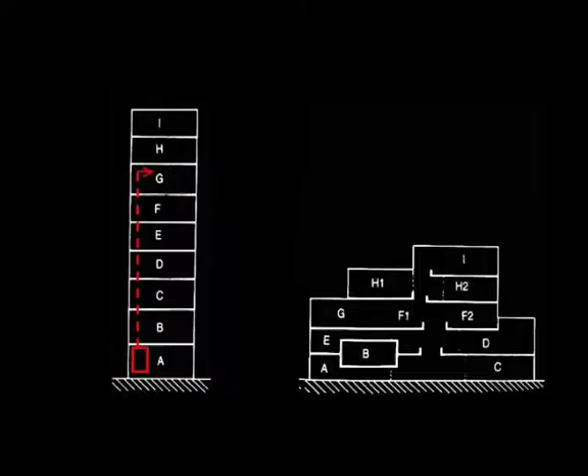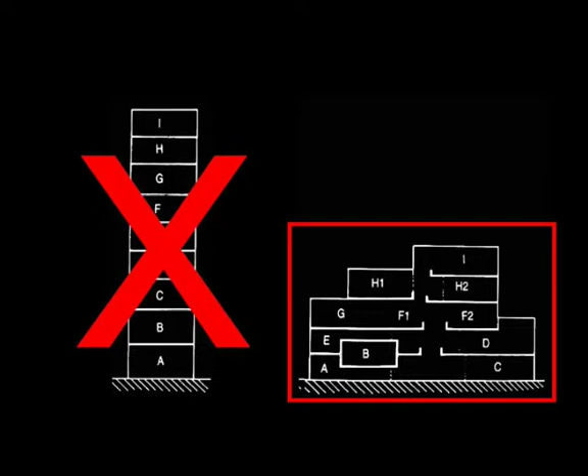Now, if you were to live in or use a low-rise or medium-rise building, then what you get is a much more organic movement between spaces. You can freely move between one and the other, and you don't have to go through this mechanistic way of pressing a button to go up to the top of the building. And so my challenge to architects and engineers who design skyscrapers is: why can't you design your skyscrapers the way you design low-rise and medium-rise buildings? The answer is yes. But why don't you do it? It makes a much more humane and much more habitable space. And so this is one of the ideas that I started with.

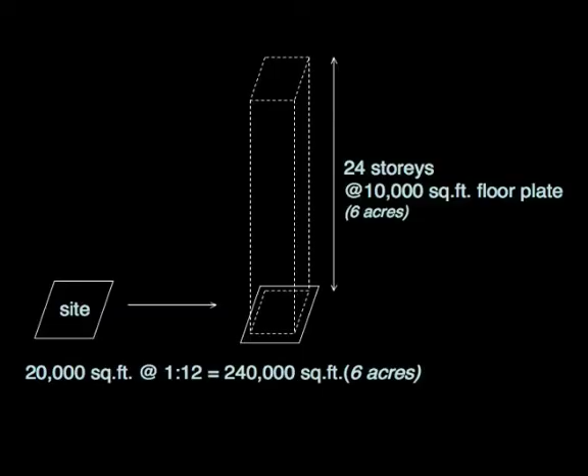And I said, let's not design skyscrapers as homogeneous stacking plates, one on top of each other, giving us instant stratification, but try and design skyscrapers in a much more organic way, in the same way that we design low-rise and medium-rise buildings. And so I started to think, why can't you design skyscrapers the way you do urban design? Now, if you take a site of about 20,000 square foot, I'm sorry, this is not metric, and if you have a gross floor area plot ratio of 1:12, then you have the potential to build a 240,000 square foot building. If you have a floor plate of about 10,000 square foot, what you have is a 24-story building.

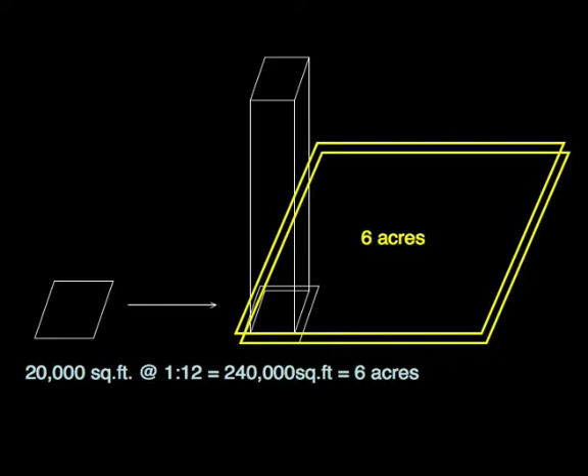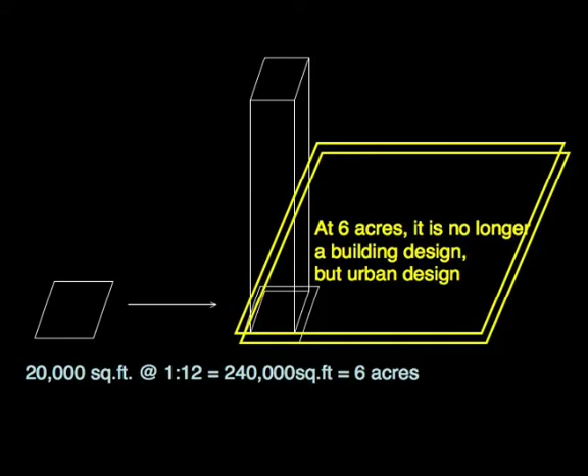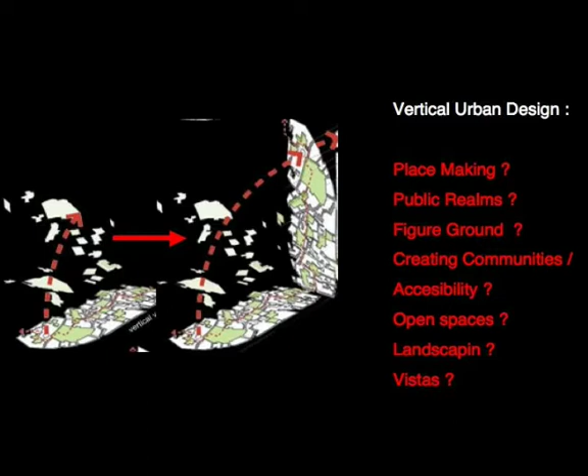Now, if you spread it all out in a single-story building, what you have is a building of about 6 acres. And if you ask an architect or a planner to design something on a floor plate of 6 acres, what you have is not architecture anymore. What you have is urban design. So all the key aspects of urban design come into play. And so this is, if you like, a plea not to design skyscrapers as homogeneous floor plates, as fortresses on island sites, but to reconnect them. In other words, see skyscraper design as vertical urban design.

That means take everything that you find pleasurable at the ground plane upwards. So all the principles that you know about urban design, like placemaking, creation of public realms, figure-ground relationships, creating communities, accessibility, open spaces, landscaping, creating vistas and so forth. What if you flip it vertically? What does it mean? What does placemaking in the sky mean? What does public realm in the sky mean? What does figure-ground relation in the sky mean?

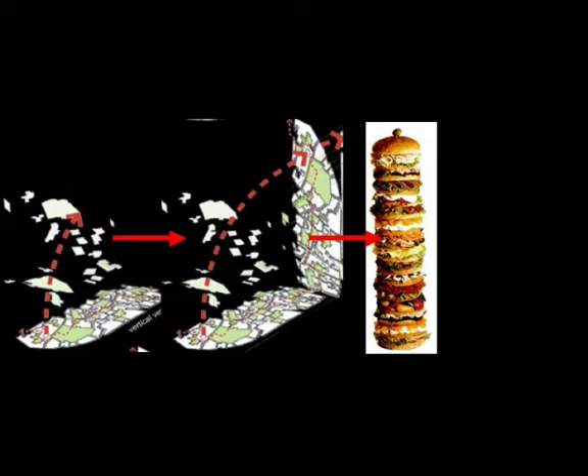What does it mean by creating communities in the sky? So this is a challenge, and this is the proposition that has been occupying me in our work, and that I hope will stimulate you into rethinking a different way of designing skyscrapers. And so instead of doing skyscrapers as homogeneous plates, what you have is a superburger with different things in the building, stacking all the way up, if you have to go up. And to make it pleasurable for people.

And that's why, about 20, 30 years ago, there was a reaction against skyscrapers because they were just terrible places to be in. And it reminds me of something that a famous Sri Lankan architect, Geoffrey Bawa, said just before he died. Somebody asked him, Mr. Bawa, what is architecture all about? And Mr. Bawa said, architecture is about making people happy. I think this is what we have to do. Not only do we design buildings that function, that make our clients money, we have to design skyscrapers that make people happy. And so these were some of the early work that we did.

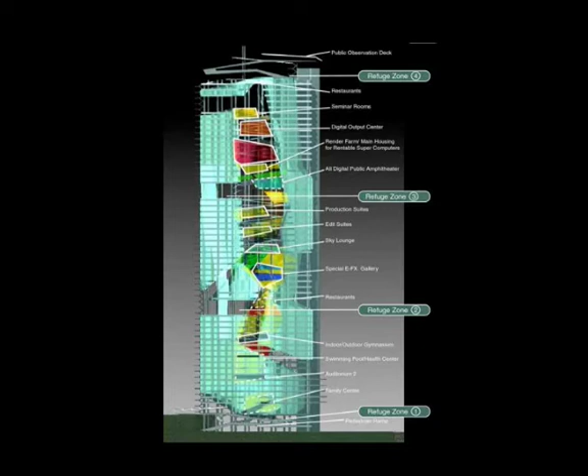We said, look, one of the first things you need to do is not to put everything in the ground plane, but to have multiple programs in the sky. In other words, why can't you have the pub in the sky? Why can't you have the gallery in the sky? Why can't you have schools in the sky? Why can't you have the chemist or the corner newsagent in the sky? And so in this way, we're recreating what we find pleasure in the ground plane up in the sky.

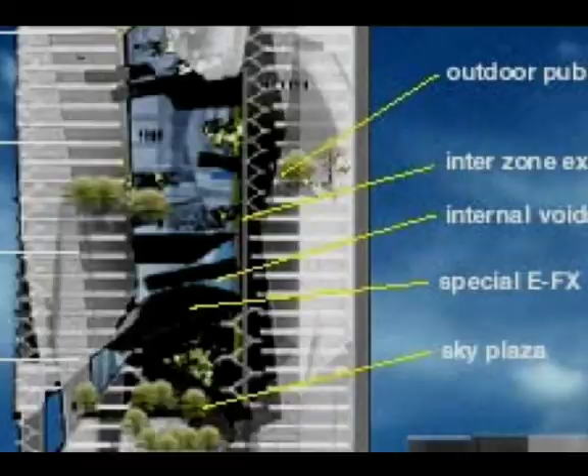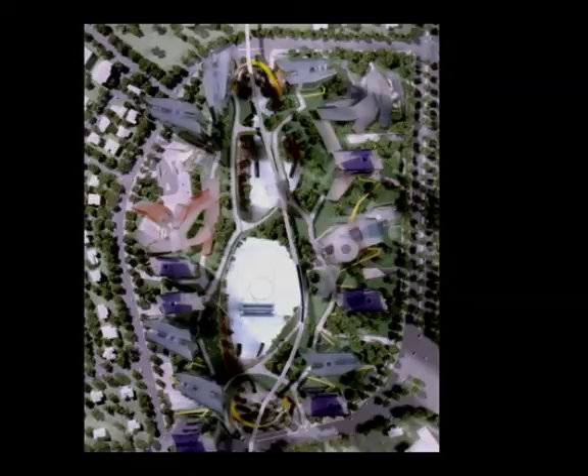So here's a scheme that we designed somewhere in Europe, where we suggested that instead of having parks surrounded by buildings, recreate a park first and put the buildings in, and try and recreate these pleasurable, different multiple programs in the upper parts of the building. Within the site, this is our signature tower. We can see the study diagrams, the ideograms, if you like, in the first two diagrams, and then the refined scheme on the right-hand side. And so the idea would be to have multiple programs in the sky, create multiple open spaces in the sky at different levels, and have multiple accessibility.

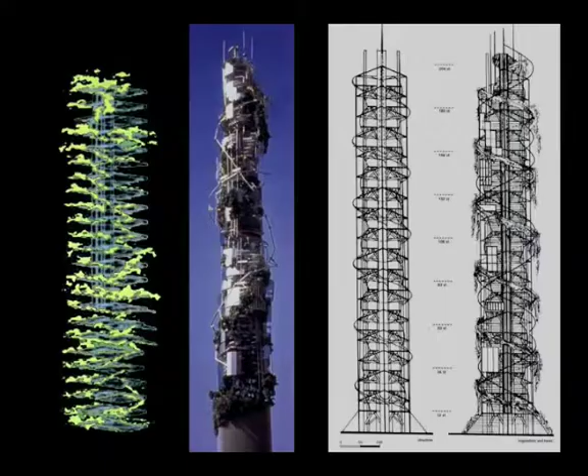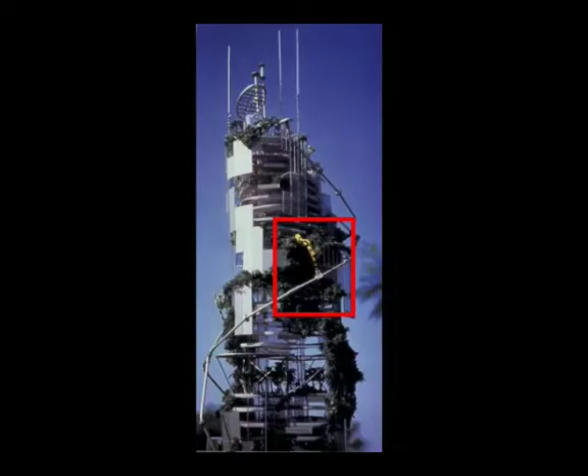How about greening the skyscraper? Biodiversity is an important factor because in nature you have both organic components and inorganic components, or in fact in ecosystems defined as biotic components and abiotic components acting together to form a whole. Now if you look at a building like what we have here, everything in this building is inorganic. The only thing that's organic is you and me and the bacteria and the bugs. And so if you keep building like this, the whole world becomes increasingly artificial.

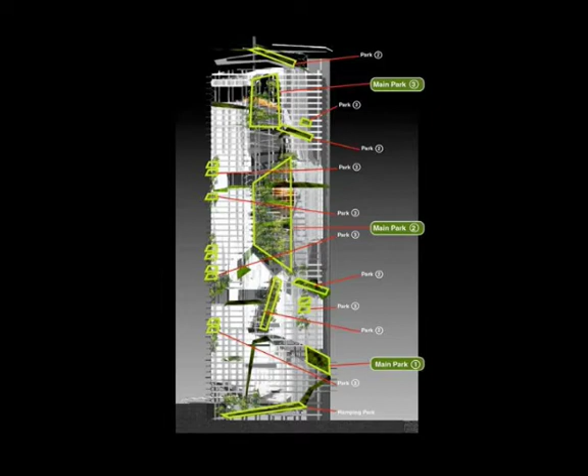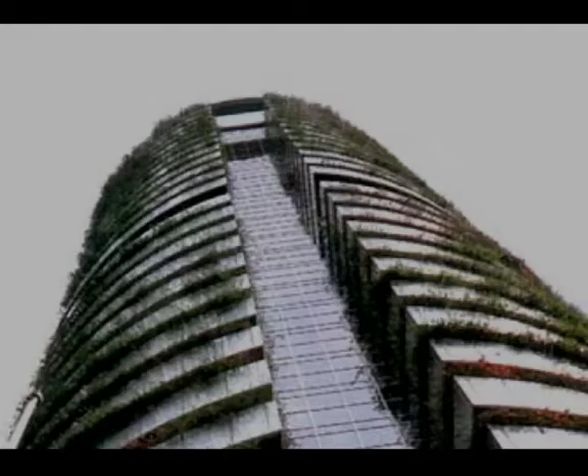These are the buildings that we did a few years back, where we started to put vegetation on the outside of the building, and when it was completed, it was referred to as the hairiest building in the world. Now this image is also emblematic for me, because I believe that the skyscraper, the green building of the future, will not look like a conventional autonomous building. It will be fuzzy, it will be hairy, and it will be an integration of organic and inorganic mass. Now the other day I was in Vancouver, and I was driving down the street with my client and a local architect, Mr.

James Cheng, and he pointed out the building to me and he said, this building received LEED Platinum Award. And my client said, well, it looks like any other building. And so, this is what a lot of architects and engineers have been doing. They just take any old building design, stuff it with all sorts of eco-technology, with photovoltaics, recycling systems, wind generators, and say that's a green building. But it doesn't look like a green building.

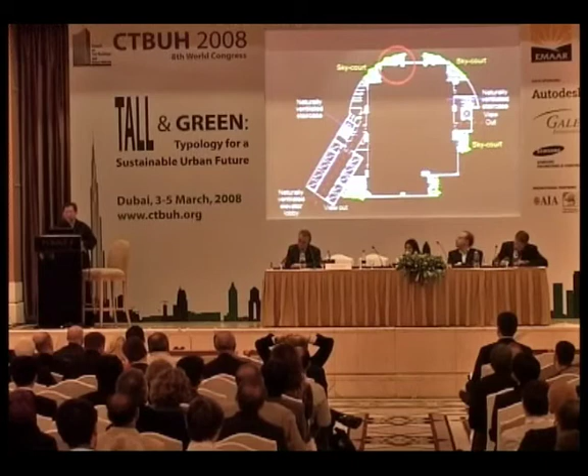I think explicitness in green buildings is extremely important, and trying to make a building look green is just as important as adding all this technology to it. This is the floor plate of the building. You can see I have terraces all the way around the edges of the building, and that's where the greening takes place, at the edges. But the idea of spiraling, of integrating green with buildings, was something that, again, intrigued me.

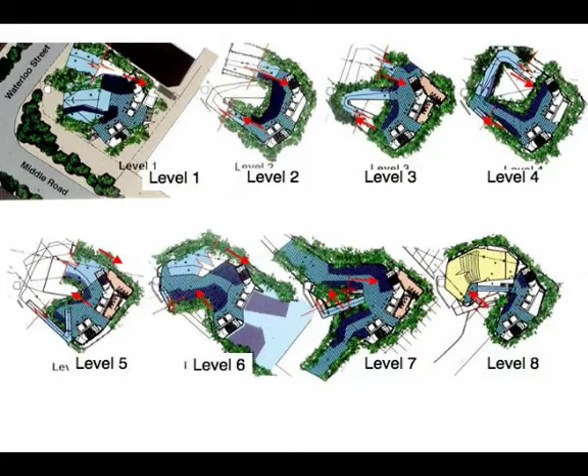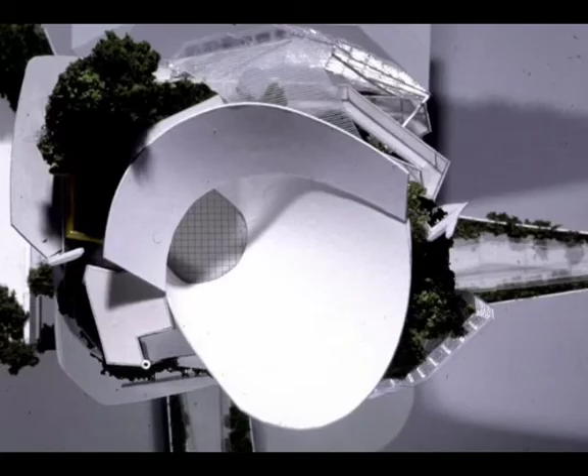And this was the design we did for a building in Singapore, where we had a ramp that circles entirely around the edges of the building, and then we brought vegetation from the ground, working its way up to the top of the building. And then at the top of the building, we have this contained with this sort of shell, which collects rainwater for harvesting. And in addition, we have scallop-shaped sunshades that collect the rainwater for harvesting.

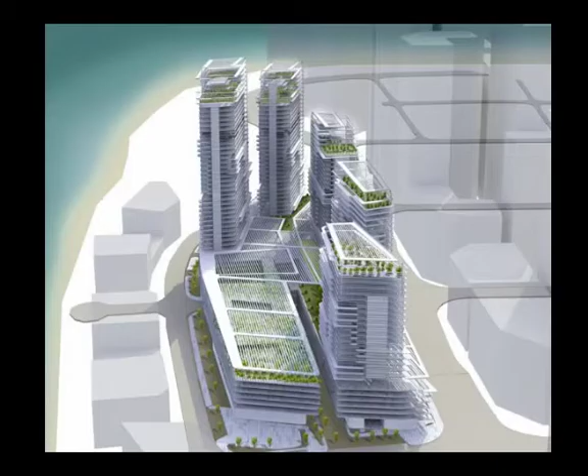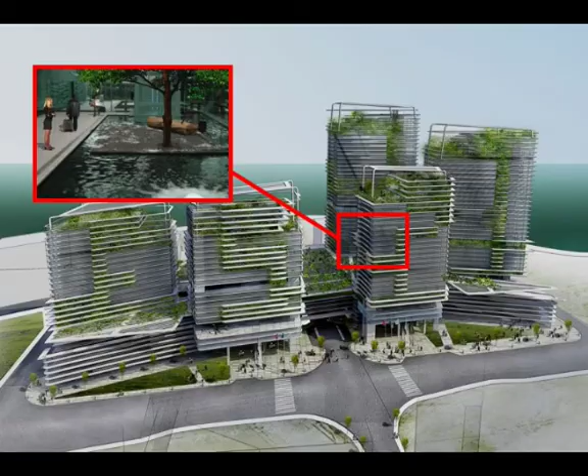The idea of creating places in the sky was something that intrigues us. And so in the way that we brought vegetation up the building, you cannot do this always on the outside of the building. So with this scheme in Abu Dhabi, what we did was to have a series of atriums that are linked and weave their way up to the top of the building, and then in the upper parts of the building, we create pleasurable spaces like these, so that what we find pleasurable on the ground, we find up in the sky.

Now, some time back, the British Council gave a lunch in which the guest of honor was the Duke of Gloucester. The Duke of Gloucester, as you know, is the cousin of the Queen of England, and used to be an architect before he gave up being an architect for his royal duties. I had just written a book which I call The Vertical Theory of Urban Design, and because I was an architect, I was placed next to him over lunch, and I said, Royal Highness, here's my latest book, which I hope you read as an architect, and it's about rethinking the skyscraper, a vertical theory of urban design.

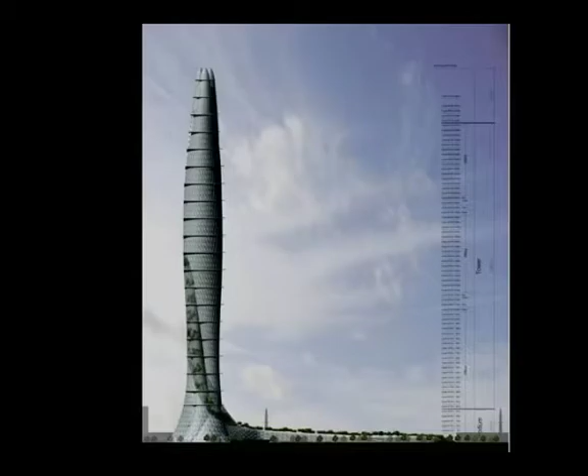Then he looked at me and looked at the title, and he said, oh, Ken, that reminds me of my definition of dancing. So I said, well, Your Royal Highness, what is your definition of dancing? Well, he said, dancing is for me the vertical expression of horizontal desires. And I said, that's what skyscraper design should be, the vertical expression of horizontal desires. And so this is the skyscraper we design, and what we try to do is to recreate the pleasures in the upper parts of the building.

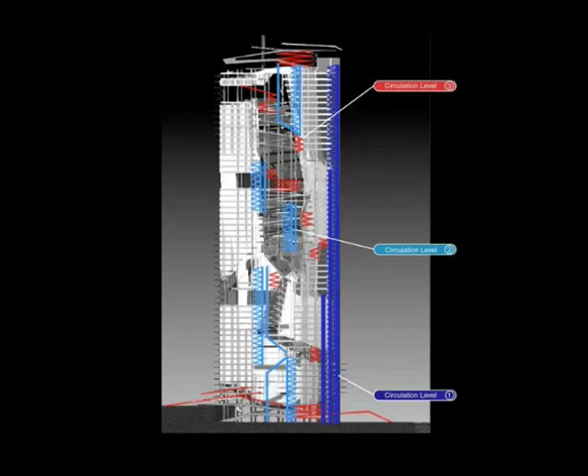Now, I talked about the skyscraper in the same way that at the ground plane, for a site with a large footprint, we would have multiple accessibility. Why can't we design skyscrapers with multiple accessibility? We shouldn't have just one single bank of elevators, even though you have transfer floors. We should have secondary banks that maybe serve 10, 12 floors, tertiary elevators, movement systems within the 10, 12 floors, so maybe 4 or 5 floors, or maybe even quaternary systems of ramps and small elevators that serve, say, 2, 3 floors.

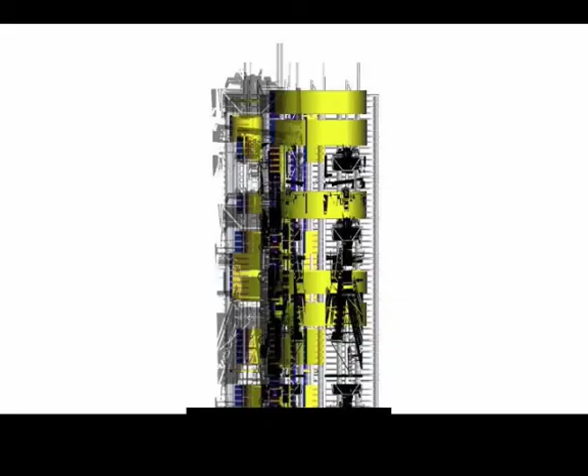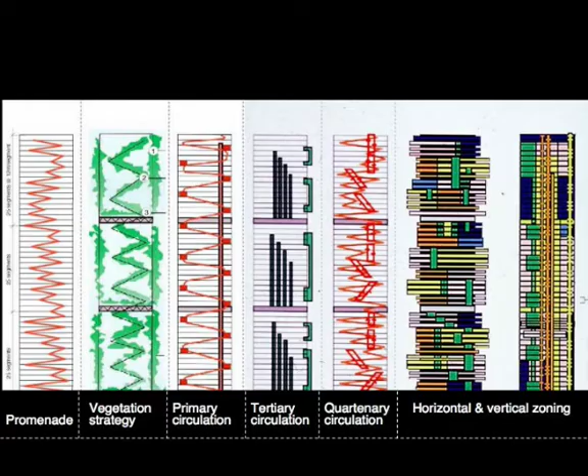This is one of our early designs for a 500-meter skyscraper, and again the idea was to have a promenade that weaves its way up the building in the same way that the city has a promenade, a vegetation strategy that works its way up, again with paths in the sky, a primary circulation system, elevators, then a mass transit system, a light rail system like you have in the Alpine railway lines that weave on the outside of the building with stations in between, tertiary circulation system, quaternary, and then horizontal and vertical zoning as well.

So I'm going to end in a minute. I'm going to talk a little bit about some of the experiments we've done in designing the naturally ventilated skyscraper.

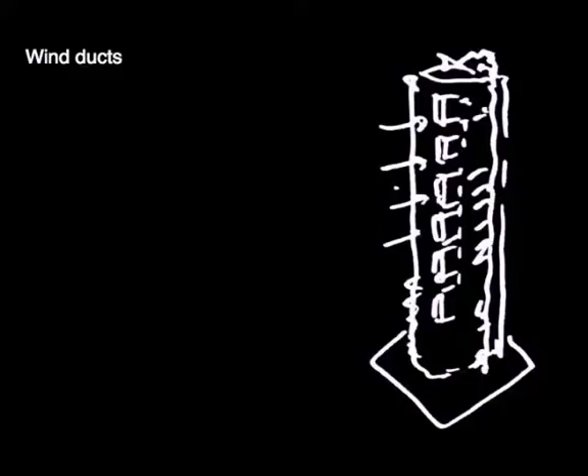One of the thoughts we had is, why can't we have wind ducts to capture the wind and ventilate inside the building? And so here's a scheme that we designed in Penang, in Malaysia. And now we designed this as a naturally ventilated skyscraper by default and not by design, because the client says, well, how much does it cost to build this building? I said, well, it costs you so much per square foot. And he said, why is it so expensive? And I said, that's because you have to put all these things to make it comfortable. And he said, well, could you make it cheaper?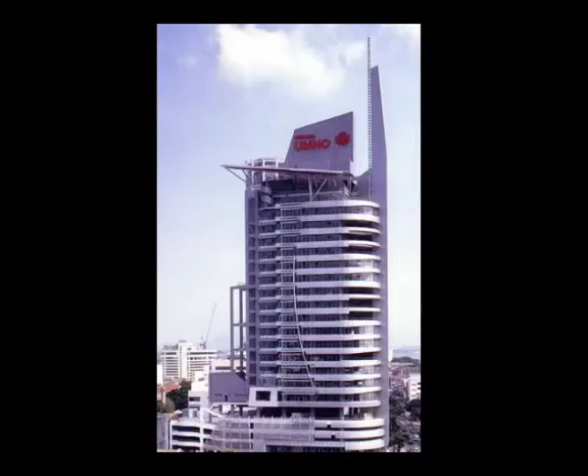Well, I said, if you take out the air conditioning system, the occupants that come in will bring in their own air conditioning condensers, and you reduce the cost of building. So I said, right, well, let's take out the air conditioning system. Then he says, could you make it cheaper? I said, well, we'll take out the windows. I said, no, we'll keep the windows, we'll take out the air conditioning system. And so I said to my lads, well, why don't we design this as a naturally ventilated skyscraper, so that in the event the owner wants to put in the air conditioning system, we could put it in. So we had this idea to use what we call wing walls.

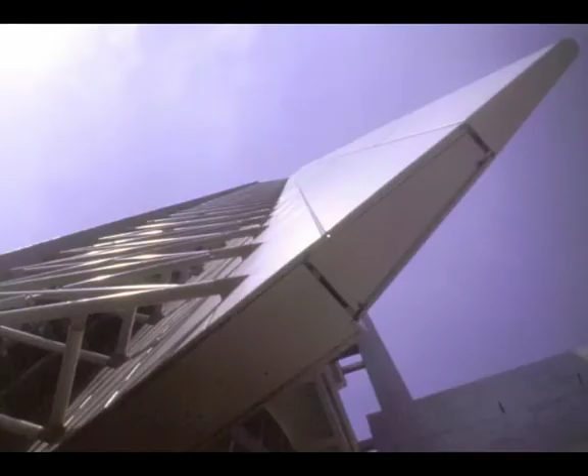Wing walls. Wind wing walls. Like the name of your Chinese neighbor.

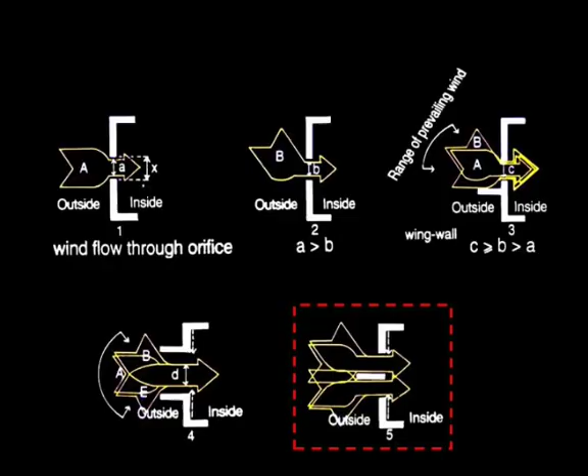Now, the idea is very simple. If you have a wind that hits the incidence of a building, then by A, what the wind enters, obviously small a. But most times, as you know, the wind hits the surface, the facade of the building at an incline, B, and then the air that you get into the building is small b. And obviously A is bigger than B because it's an incidence to the facade. So the idea was, what happens if you have a wing wall, a little fin that captures the wind, then the wind that enters the building, C, is obviously bigger than B and bigger than A.

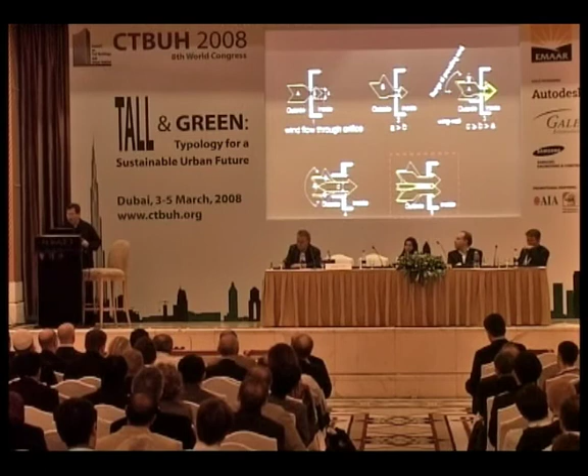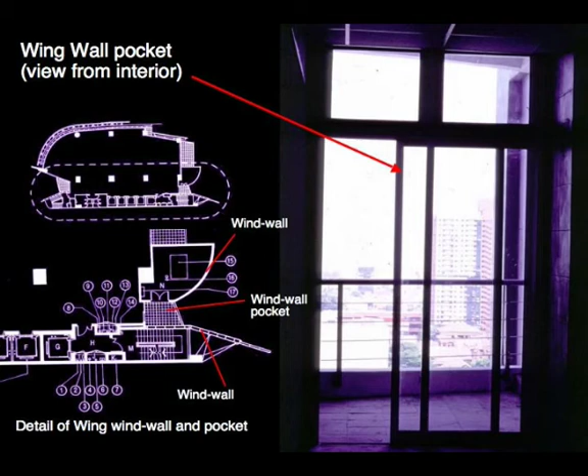And so what you see on the bottom left-hand side is an idea that you have two wing walls, you capture the wind, and then you get d coming to the building. And obviously another idea would be to have the wing wall right in the middle, so that you can capture wind from all directions. And so here's the scheme, here's the floor plate, and what you have is two wing walls with a wind pocket, a balcony that captures the wind, and you have sliding doors to moderate the wind coming in.

Now don't forget, this is not in London, this is not in Europe, not in the US. This is Malaysia, which is not first world, was not third world either. I'll call Malaysia 2.5 world. And so, with this sort of situation, it's a very primitive idea, that we would have sliding shutters with these wind pockets. So we simulated this, and we looked at the effects of wind on the facade.

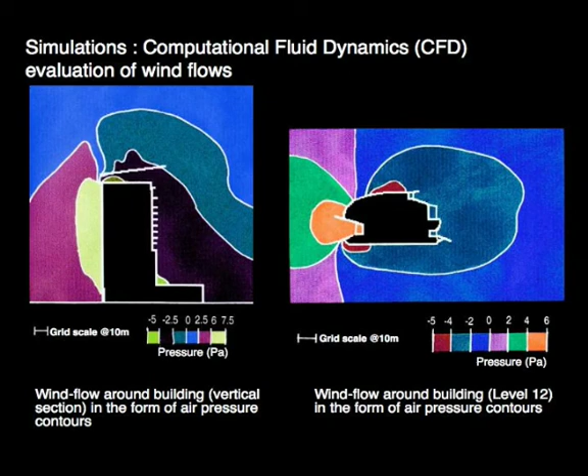And so the idea led us to develop this graph, where we have wind speeds in meters per second on the bottom axis. On the top axis we have percentage of the windows that are open, and then we look at the windows at different levels, and we plotted the graphs for different facades. So you can see the graph of the south windows, the graph of the north windows, and the graph of the east windows. And on the left-hand side we have different air changes, from 1 air change per hour to maybe 10 air changes.

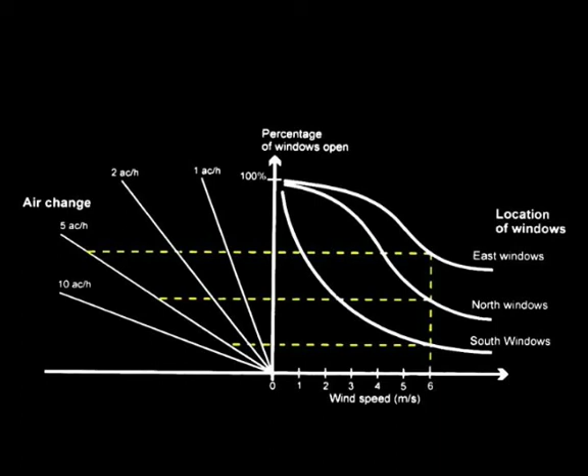And so now you can imagine that the shutters next to the wind pockets are monitored and automated. And at any point in time, if let's say the wind speed on the outside is at 6 meters per second, as you can see on the lower axis, and it hits the east facade, then at a particular point we draw the line across, and it automatically opens 40–50% of the facade, and you get your 5 air changes per hour. So this was the beginning of the potential for a naturally ventilated skyscraper.